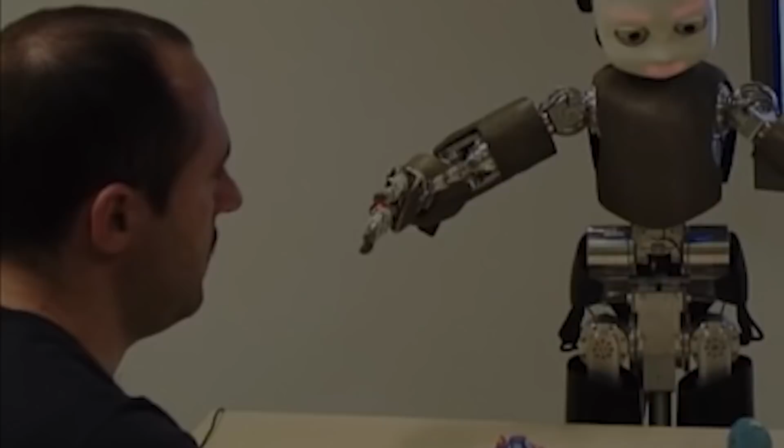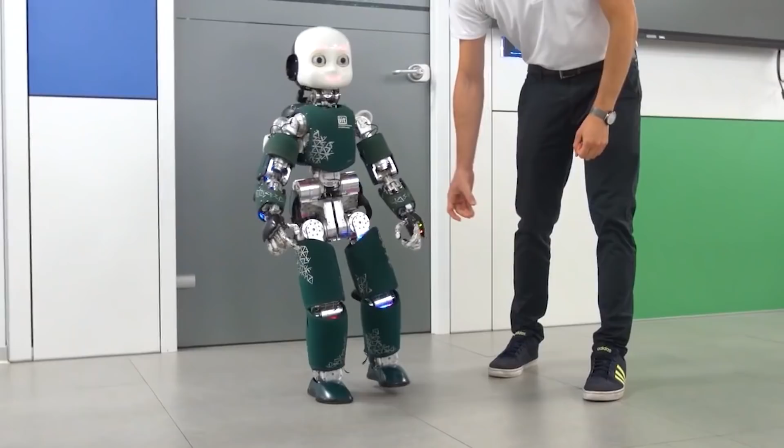From iCub all grown up, robots getting inspired by Moai statues, and aid for field robots, all the way to a cute desktop robot and an e-nose to sniff out the best whiskey, we have it all and more. So, without further ado, let's jump right into our weekly updates.

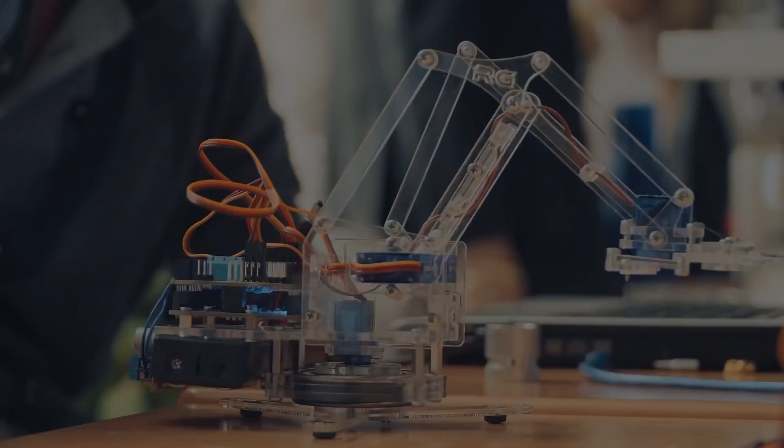Highlights of the week. iCub is growing up. It's a little weird to think that iCub, the first version of which was released in 2008, is now a full-on teenager. After all, the robot was originally designed after a 3-year-old child, and it hasn't grown all that much.

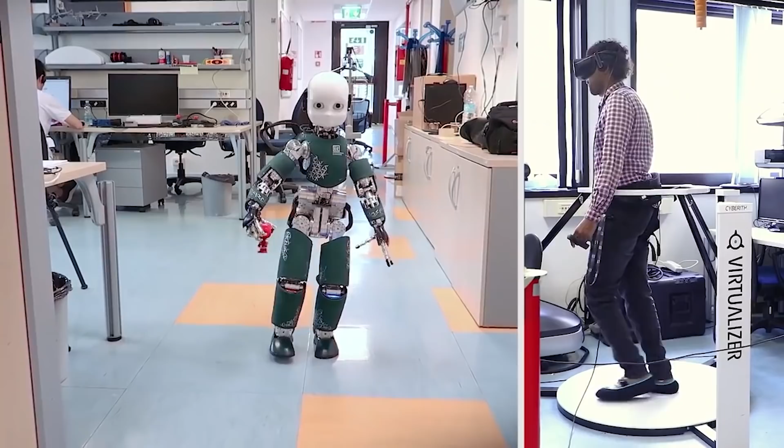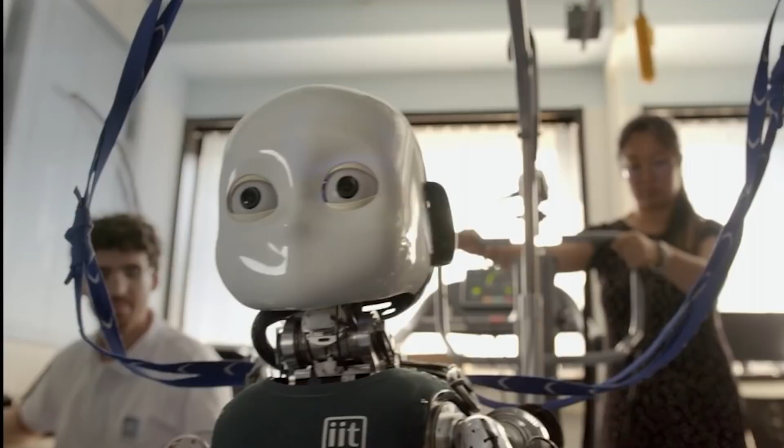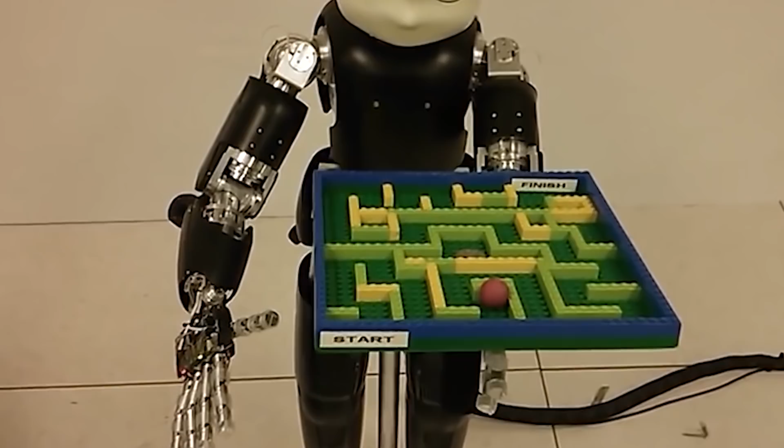But, as it turns out, iCub has grown, at least a little bit, with the brand new iCub 3, a bigger, heavier, stronger upgrade that can also be used as a sophisticated immersive telepresence platform. You might not notice the difference between the old and new iCub unless they're standing side by side. But iCub 3 is 25 centimeters taller and weighs 19 kilograms more, featuring more powerful legs and rearranged actuators in the legs, torso, and shoulders. The head is the same, but the neck is a bit longer to make the robot more proportional overall. In total, iCub 3 is 1.25 meters tall and weighs 52 kilograms, with 54 degrees of freedom.

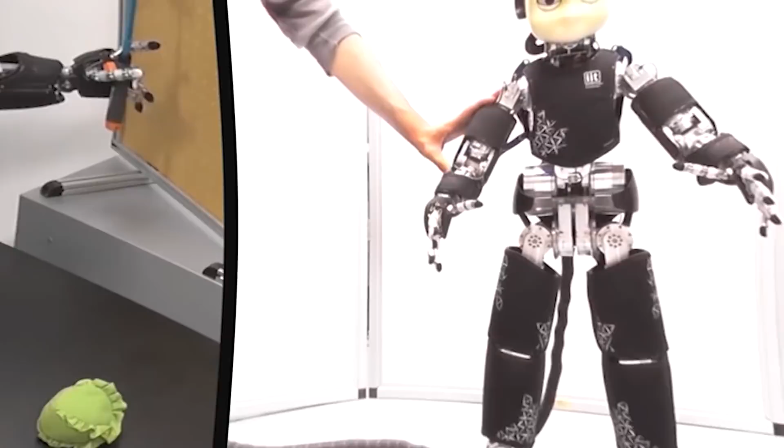Part of the reason for these upgrades is to turn iCub 3 into an avatar platform. That is, a humanoid robot that can embody a remote humanoid of the more biological type. This is something that researchers at the Italian Institute of Technology, or IIT, led by Daniele Pucci, have been working on for quite a while.

Now, a couple of the shots right at the beginning of the video they released look more like drone videos than an actual representation of the user experience. Or, at least it won't be accurate until iCub can fly, which they're working on, of course. It's also, honestly, kind of hard to tell what the user experience actually is just based on this very, very fancy video. And very fancy videos rarely inspire confidence about the capabilities of a robotic system.

Fortunately, the researchers have published a paper on using iCub 3 as an avatar, which fortunately includes plenty of detail.

Robots get inspiration from the Moai statues of Easter Island. People around the world have long been captivated by the Moai, a collection of statues that stand sentry along the coast of Easter Island. The statues are well known not just for their immense size and distinct facial features, for example, very broad noses and chins, but also for the mystery that shrouds their geographic location. The question that piques everyone's curiosity is, how did ancient Rapa Nui people move these ginormous rocks, some weighing as much as 80 tons, across distances of up to 18 kilometers?

In 2011, a group of archaeologists made some progress in potentially unraveling this mystery. They conducted an experiment whereby 3 hemp ropes were tied to the head of a Moai replica. Using 2 of the ropes angled at the sides to rock the statue back and forth, and the 3rd rope for guidance, they were able to rock and walk the replica forward, demonstrating at least one possible way that the Rapa Nui people may have moved the real Moai so many centuries ago. In the experiment, 18 people were able to move a 4.35-ton replica 100 meters in just 40 minutes.

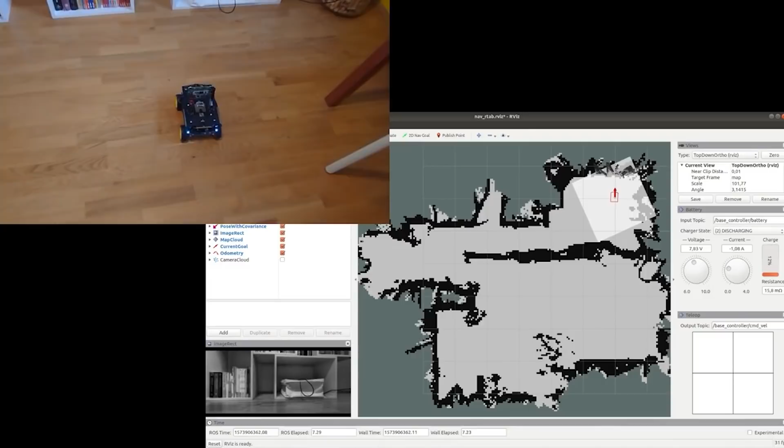WayFast for field robots. A new method of traversability predictive navigation for field robots has been developed. The team presents a self-supervised approach for learning to predict traversable paths for wheeled mobile robots that require good traction to navigate. Their algorithm, termed WayFast, Waypoint-free autonomous systems for traversability, uses RGB and depth data, along with navigation experience, to autonomously generate traversable paths in outdoor unstructured environments.

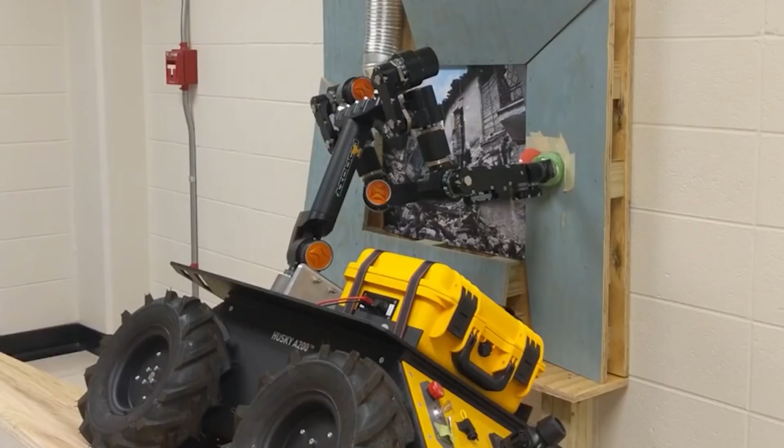Their key inspiration is that traction can be estimated for rolling robots using kinodynamic models. Using traction estimates provided by an online receding horizon estimator, they are able to train a traversability prediction neural network in a self-supervised manner without requiring heuristics utilized by previous methods.

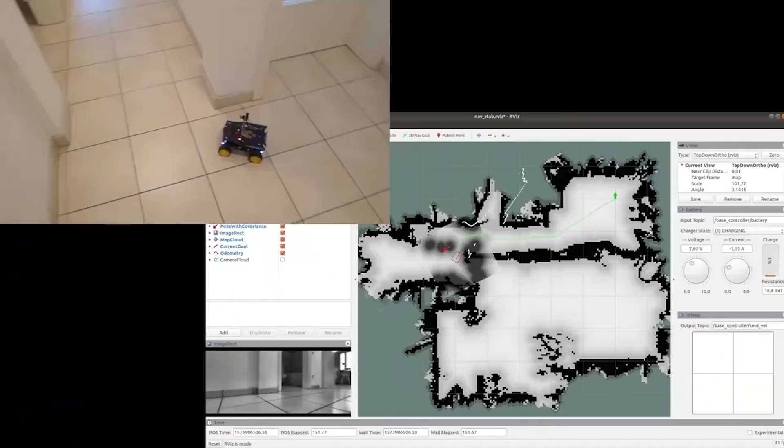They demonstrate the effectiveness of Wayfast through extensive field testing in varying environments, ranging from sandy, dry beaches to forest canopies and snow-covered grass fields. Their results clearly demonstrate that Wayfast can learn to avoid geometric obstacles as well as untraversable terrain, such as snow, which would be difficult to avoid with sensors that provide only geometric data, such as LiDAR.

Furthermore, they also show that their training pipeline based on online traction estimates is more data efficient than other heuristic-based methods.

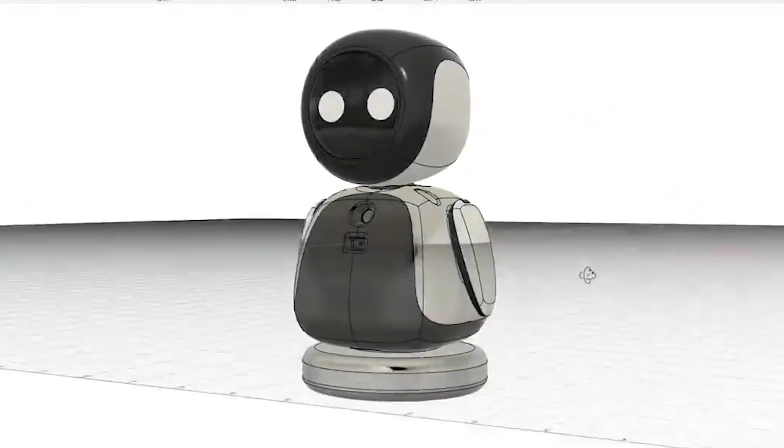ElectronBot, a sweet mini desktop robot that ticks all the boxes. Peng Zhihui seems to have found some spare time and energy to crack out another sweet robot build. This time, it's a much smaller and cuter emoji bot with the usual production-ready levels of attention to detail.

With a lot of fine details in the 3D printed models, this is one for SLS printing in nylon, but that can be done for a reasonable outlay, in China at least.

The electronics package consists of a few full custom and tiny PCBs designed with Altium Designer with off-the-shelf modules for the circular LCD and camera.

The main board hosts an STM32F405 and deals with the display and SD card. The reason for this choice of STM32 was due to the requirement for connecting to an external USB 3300 high-speed USB PHY.

There is a sensor PCB which handles the gesture sensor, a USB hub, MPU 6050 6-axis sensor, and also the USB camera module.

This board attaches to the USB-C connector in the base via a FFC cable, allowing the robot to rotate on its base. Peng clearly has exacting standards as to how things should work, and we guess wanted to have the

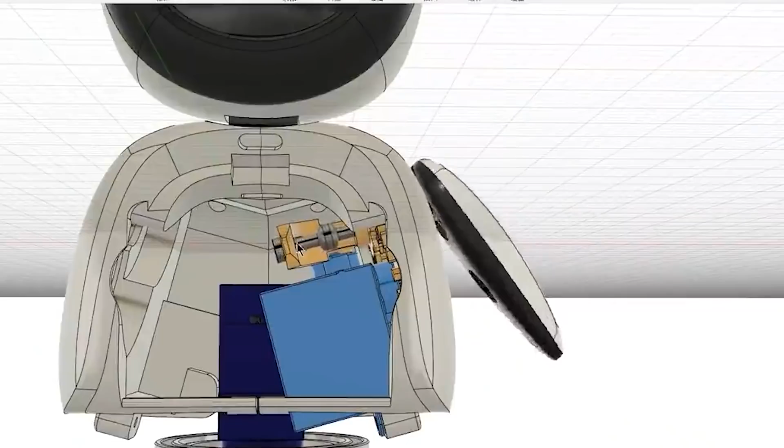arms backdrivable in a way that enabled the host computer to track and record the motor positions for replaying later on. The connection back to the controller is via I2C, allowing all 6 servos to hang on the same bus, saving precious resources. Smart!

Getting a processor and motor driver in such a tiny space was a bit of a challenge, but a walk in the park for Peng, as he demonstrated in his video, which you might require English subtitles for. The arm mechanism is particularly interesting, and rather elegantly executed, and he does seem rather proud of this part of the design, and so he should.

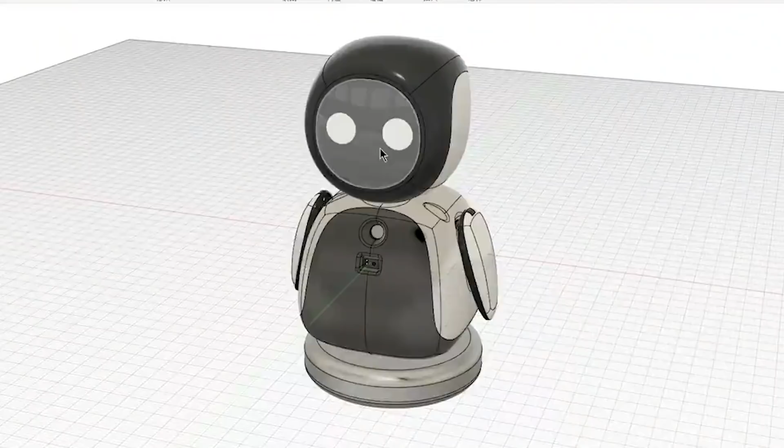Like with Peng's other projects, there is a lot to see and plenty of scope for feature explosion. It was nice to see the bot being used as an input device, not only with gesture sensing via the dedicated sensor, but also using the camera with OpenCV to track user posture and act accordingly.

This thing could act as genuinely useful AI device, as well as being darn cute at the same time.

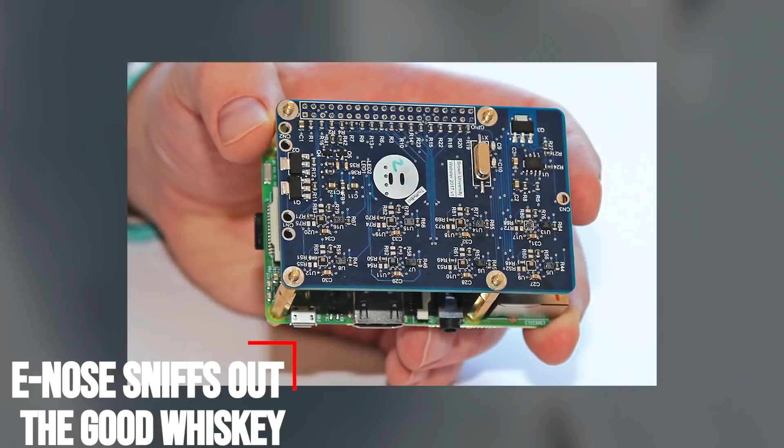eNose sniffs out the good whiskey. A whiskey connoisseur can take a whiff of a dram and know exactly the brand, region, and style of whiskey in hand. But how do our human noses compare to electronic noses in distinguishing the qualities of a whiskey?

A study published 1st February in IEEE Sensors Journal describes a new eNose that is surprisingly accurate at analyzing whiskeys and can identify the brand of whiskey with more than 95% accuracy after just one whiff.

eNoses have been gaining in popularity over recent years thanks to their range of valuable applications, from sensing when crops are ready for harvest to identifying food products on the cusp of expiring.

It is perhaps unsurprising that many eNoses have also been developed to analyze alcoholic beverages, including whiskey, which had an estimated international market worth $58 billion in 2018 alone.

This lucrative industry has the potential to be a target of fraudulent activities such as mislabeling and adulteration, explains Steven Su, an associate professor at the Faculty of Engineering and IT, University of Technology, Sydney.

Trained experts and experienced aficionados can easily tell the difference between whiskies from their scents, but it is quite difficult for most consumers, especially amateurs.

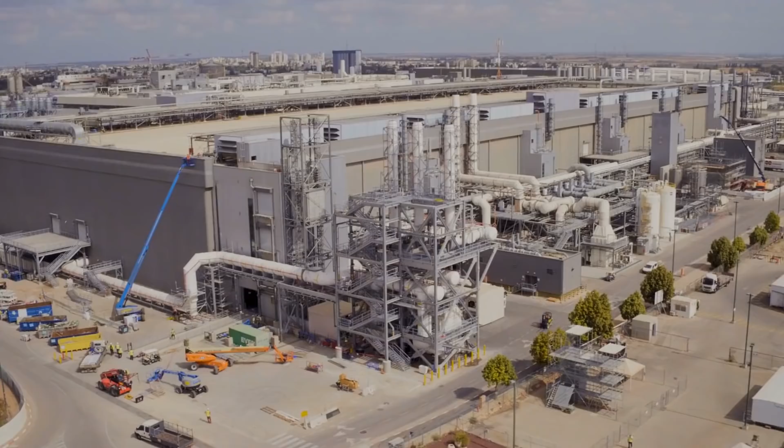Therefore, Su and his colleagues sought to adapt one of their eNoses so that it could analyze some key qualities of whiskey.

Their original eNose was designed to detect illegal animal parts sold on the black market, such as rhino horns, and they have since also adapted their eNose for breath analysis and assessing food quality.